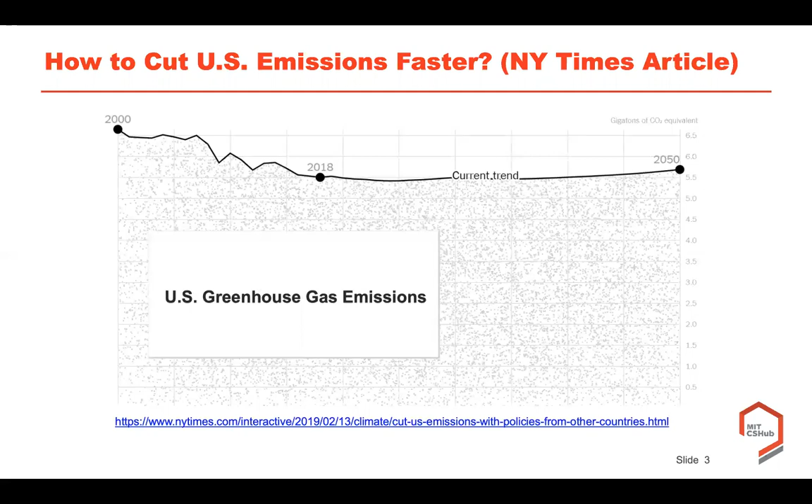In this article, the authors talked about 7 different mitigation solutions around the world, and they evaluated the impact of those mitigation solutions if applied in the US in order to reduce GHG emissions from 2018 to 2050.

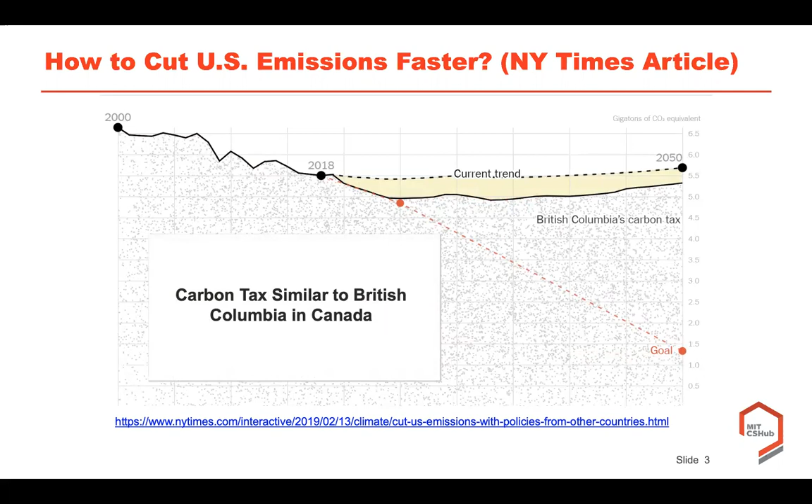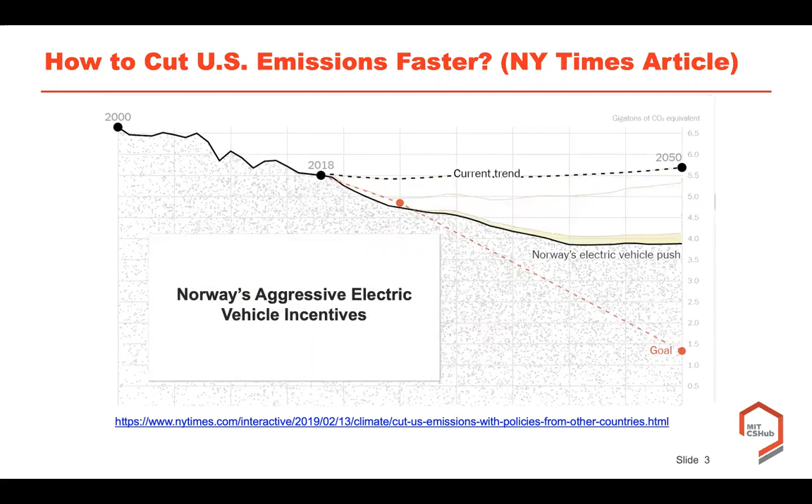The first mitigation solution was a carbon tax similar to British Columbia in Canada. The second was New York's goal for clean electricity generation. Number 3 was Norway's aggressive electric vehicle incentives. Number 4 was China's efficiency target for different industries such as cement, steel, and petrochemical.

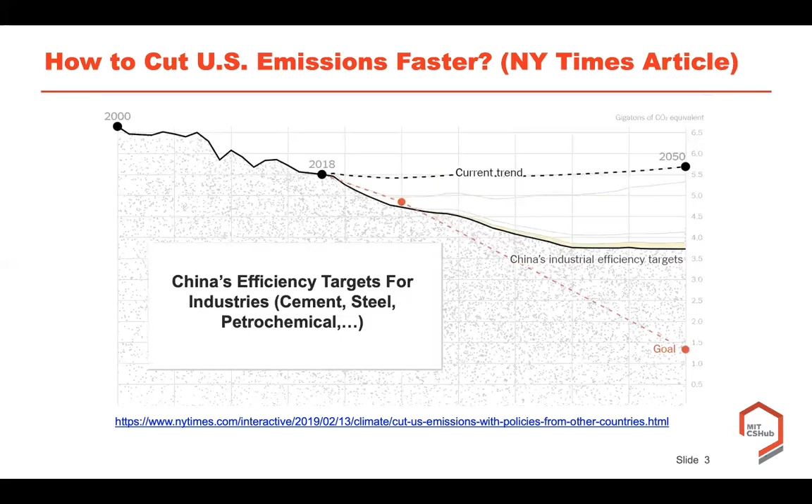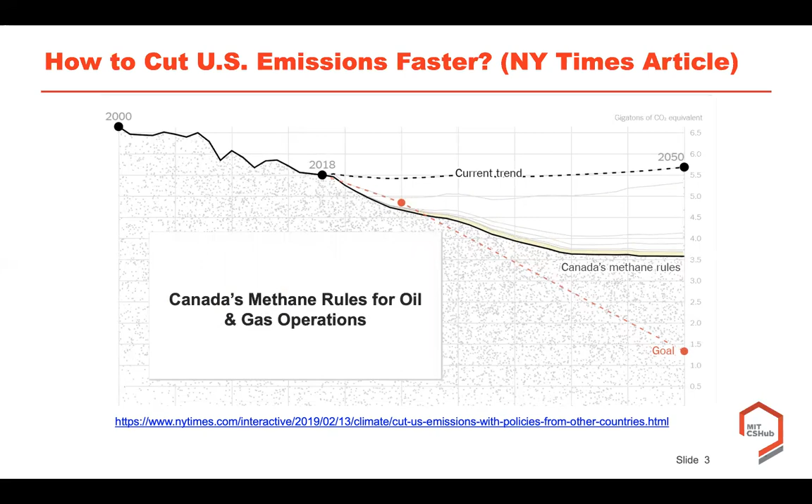Number 5 was California-style energy codes for new buildings. Number 6, Canada's methane rule for oil and gas operations. And number 7, the last one, was Europe's legislation for phase out of HFCs.

You can see that after applying all of those 7 mitigation solutions, by 2050 we still have more than 3 gigatons of GHG emissions. But the goal based on the Paris Agreement is less than 1.5 gigatons of GHG emissions.

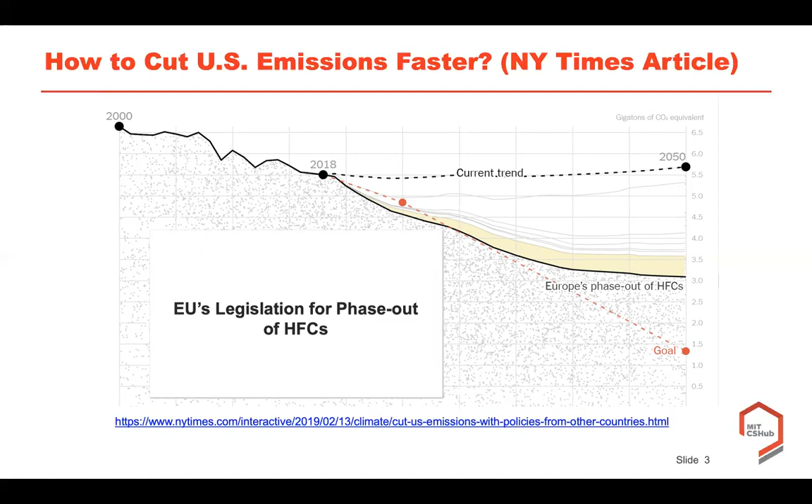So in this study, the main objective was first providing an outlook for the environmental impacts of buildings as well as concrete in buildings in the US. In order to reach this goal, we had several steps.

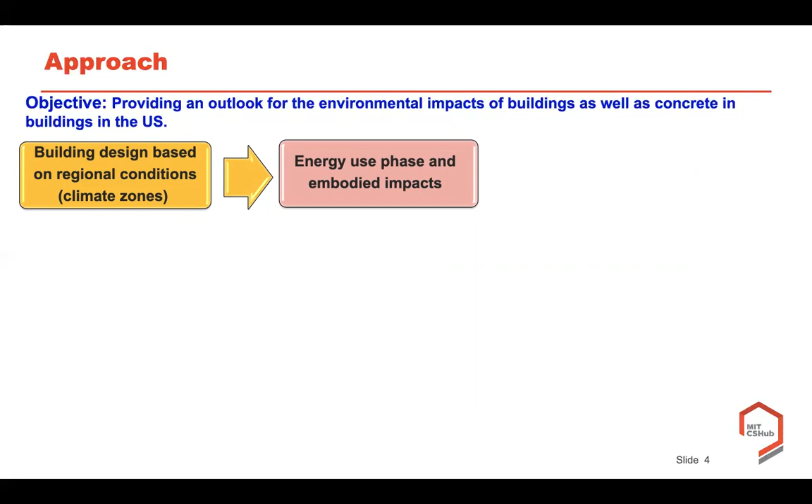The first step was designing reference buildings based on regional conditions or climate zones. Then we evaluated the energy use phase and also the embodied impacts in those reference buildings. After that, we scaled up our analysis from single buildings in different climate zones to the whole US, considering the total area in the US by 2050.

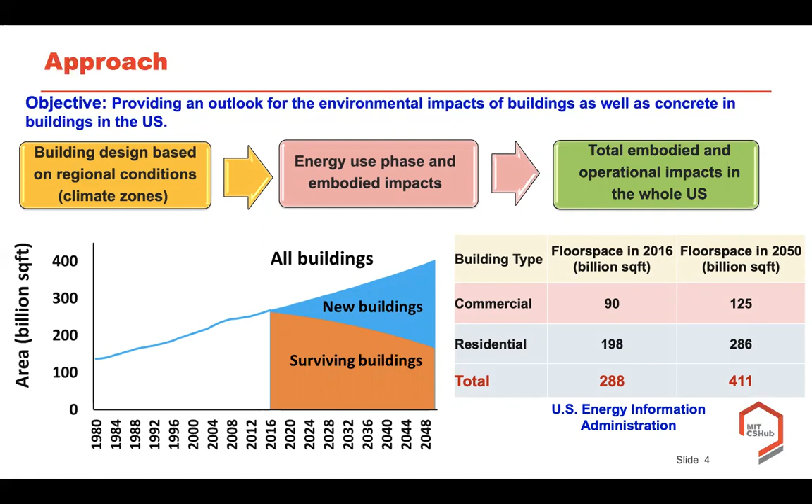We know about the new buildings, we know about the surviving buildings by 2050, so we considered all of this information. The first step was designing the reference building based on regional conditions.

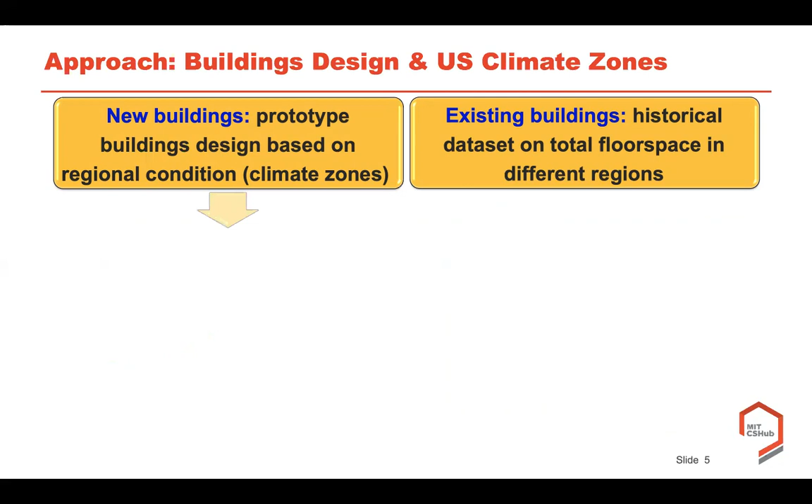As we know, we have 2 different building categories: commercial buildings and residential buildings. In residential buildings, we considered both single-family and multi-family buildings. In commercial buildings, we have more than 10 different categories, so we did a clustering analysis, and based on the results, we considered office buildings and healthcare systems.

Then we evaluated different frames. For example, in residential buildings, we considered wood frame as well as concrete frame and steel frame buildings. So we evaluated all different building frames in the US.

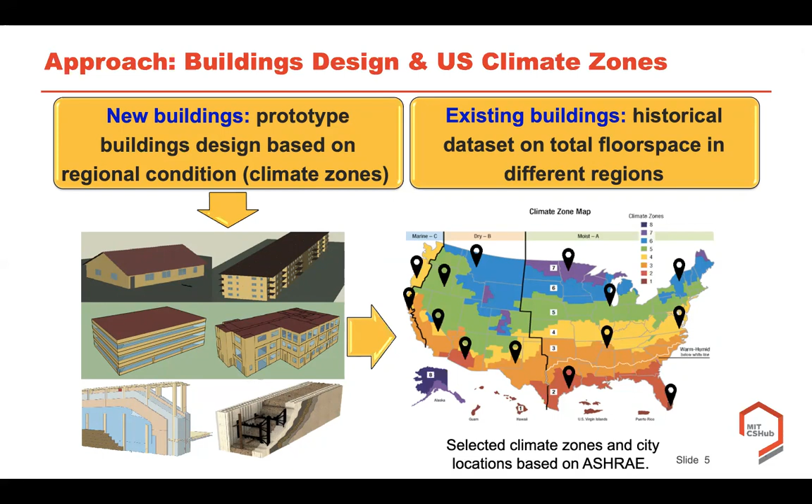We have 14 different subclimate zones in the US, from zone 1A in Miami, Florida, to zone 7 in Duluth, Minnesota. So we designed 14 different reference buildings for the whole US.

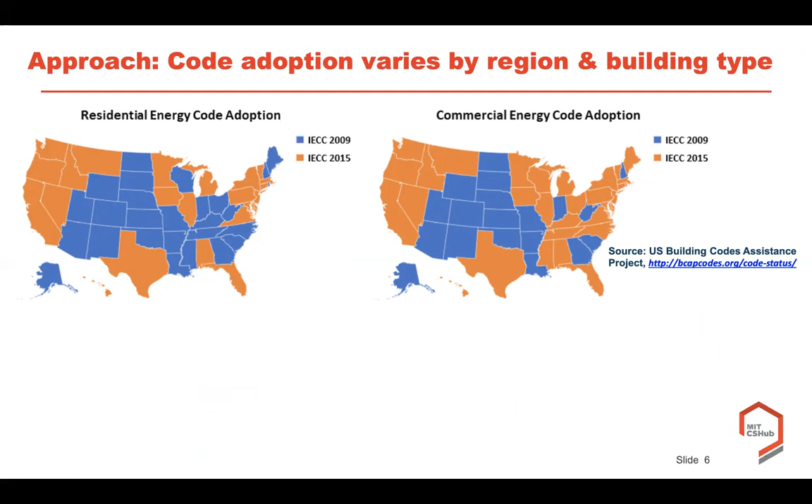For designing reference buildings, we needed to know the code adoptions. We know that code adoptions are different based on regions and also based on building types. There are 2 different code adoptions for residential and commercial buildings.

We all know that building energy codes get more stringent. For example, if we have a 2012 building code, the 2015 code is more stringent compared to 2012. If we consider an energy efficient building code, for example in 2018 or 2021, it will be more stringent compared to 2015.

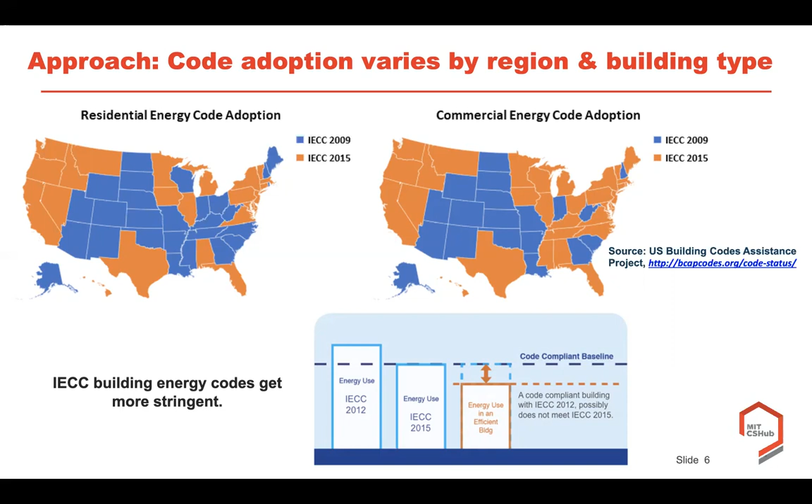In our study, we had three different energy code adoptions. The baseline was IECC 2009, and then we had IECC 2015. We also introduced another energy code adoption, which we called energy efficient, representing the future energy codes for different buildings in the US.

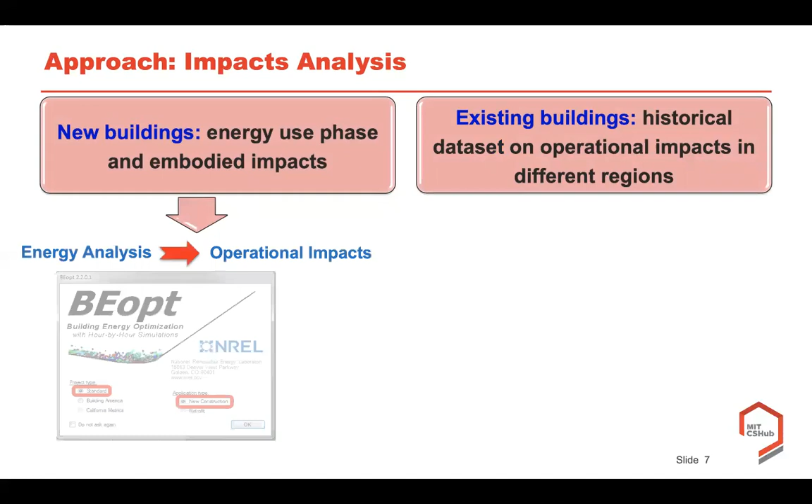Then we evaluated the energy use phase and also embodied impacts of all buildings. For energy use phase, we used the BEopt software tool developed by NREL, then extracted the bill of materials as the output of BEopt, and used that to evaluate the embodied impact using the Athena Impact Estimator for buildings.

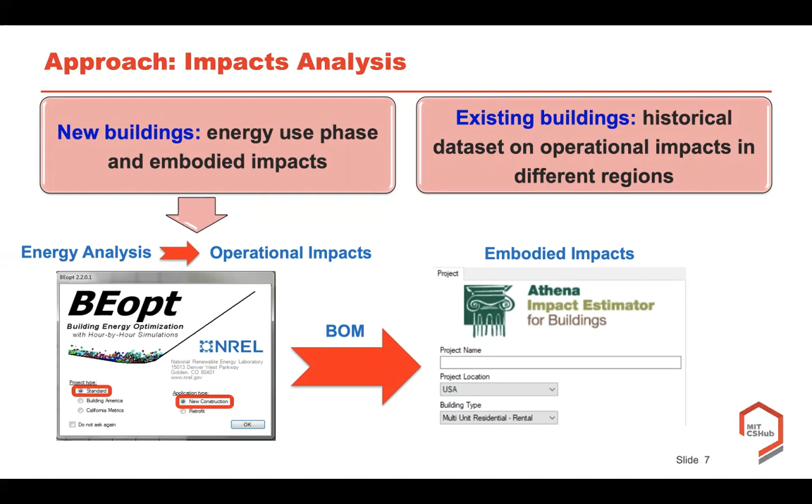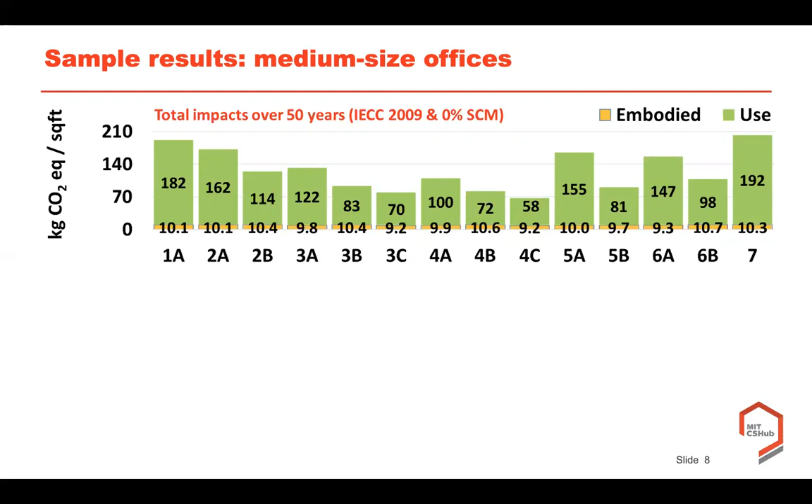This is the sample results for medium-sized offices, with similar results for all different building types. This is the baseline scenario with IECC 2009 and without any improvement in the concrete mixes, 0% supplementary cementitious materials (SCM). As you can see, we have two different bars: yellow bars represent the embodied impacts, and green bars represent the use phase.

You will see that by applying those mitigation solutions, and also by adoption of more stringent code, both embodied and use phase emissions will be reduced in all 14 different subclimate zones, from zone 1A in Florida to zone 7 in Duluth, Minnesota. These are sample results from all different studies across all building types.

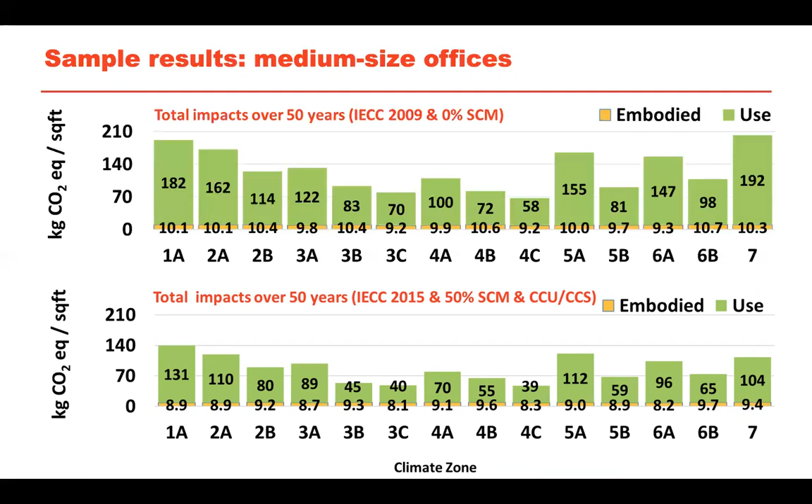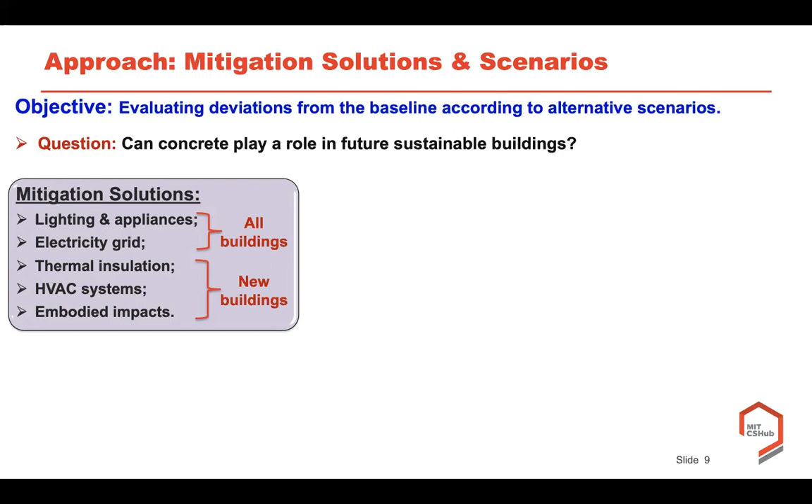The next step was evaluating deviations from the baseline according to alternative scenarios. We had 6 different mitigation solutions: improvement in lighting, improvement in appliance efficiency, and improvement in electricity grid generation, which we called electricity grid evolution. We applied these 3 solutions to all buildings, existing and new. The other 3 - improvement in thermal insulation, improvement in HVAC systems, and improvement in embodied impacts - were applied just to new buildings.

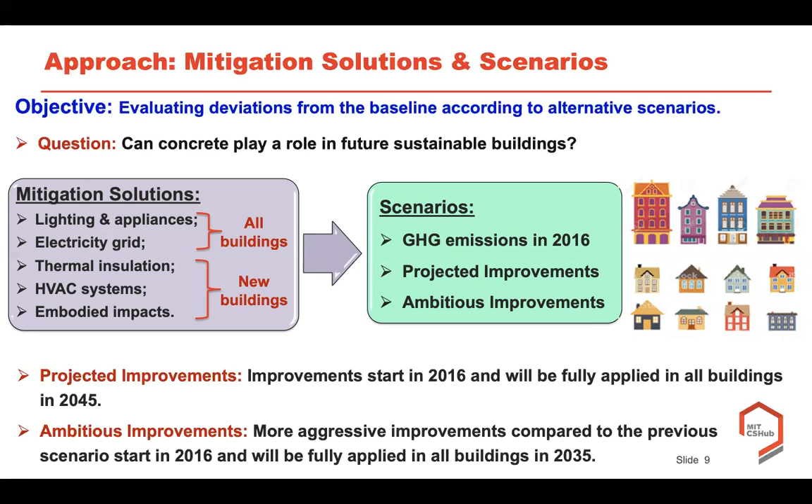We had 3 different scenarios. The first was evaluating GHG emissions based on 2016, which we called the no change scenario. The second was projected improvement, based on projected improvement in different databases. We also had ambitious improvement, which is more aggressive than projected improvement. The main difference is in the timeline: in projected improvement we start in 2016 and finish applying all mitigation solutions by 2045, while in ambitious improvement we start in 2016 but finish 100% application by 2035.

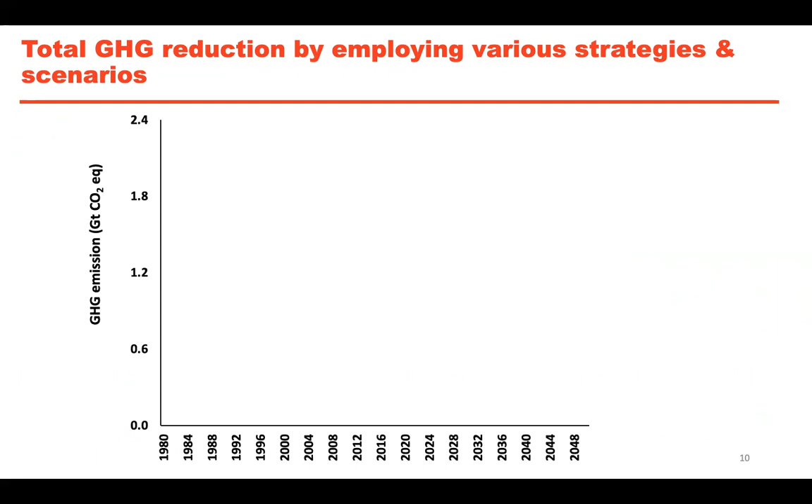This is our main graph, similar to the New York Times graph I showed at the beginning of my presentation - the historical database for GHG emissions from the building sector in the US. In 2016 we had 1.75 gigatons of CO2 emissions, equal to 27% of total US GHG emissions, considering emissions from industry, transportation, and buildings.

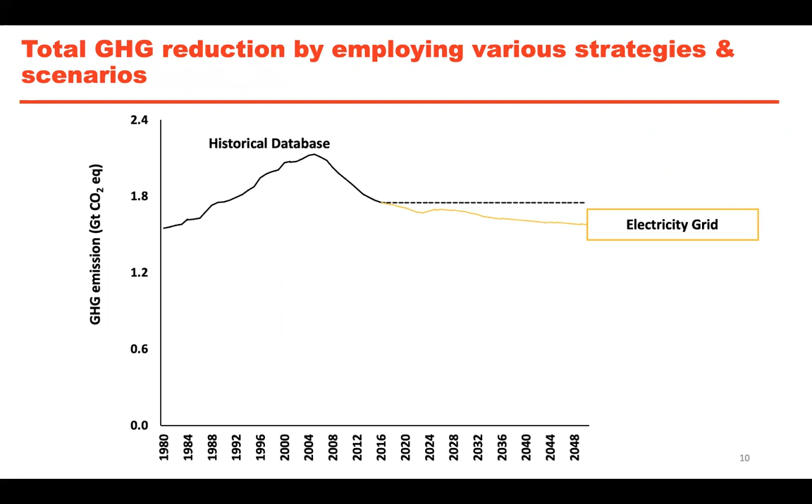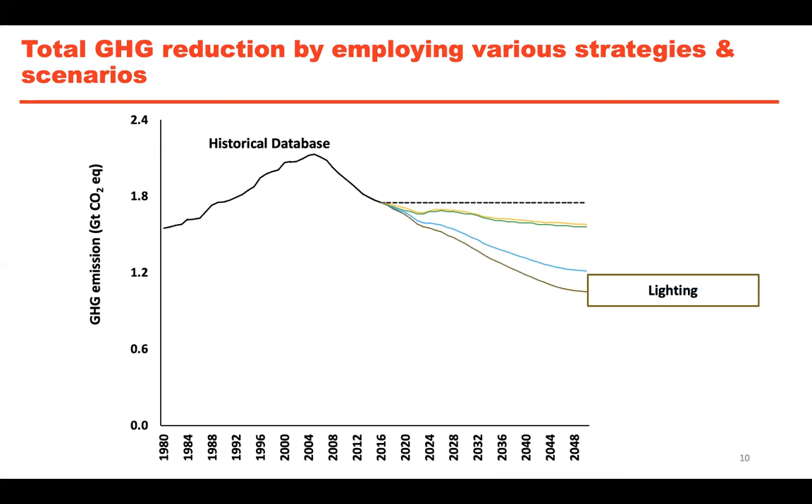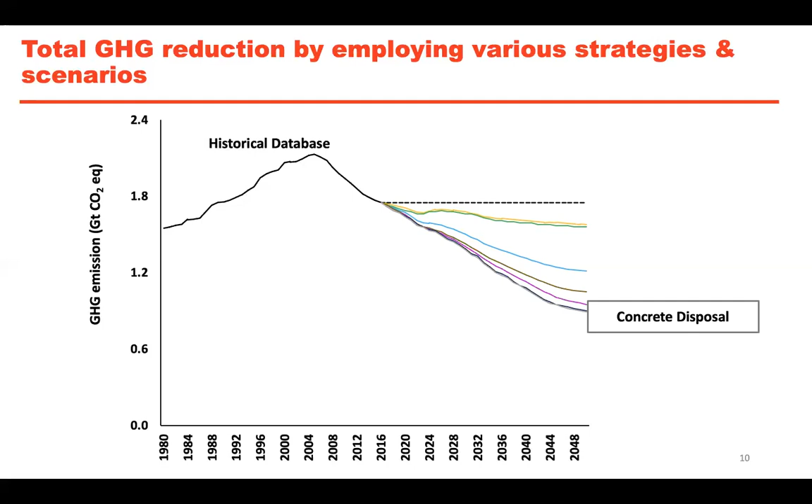The first mitigation solution was electricity grid evolution, then the second was concrete production, where we consider different mitigation solutions to reduce the impact of concrete in buildings. The third covers improvement in appliances, lighting efficiency, HVAC efficiency, thermal insulation efficiency, and improvement in carbon uptake after concrete disposal - we consider both concrete disposal and carbon uptake afterward.

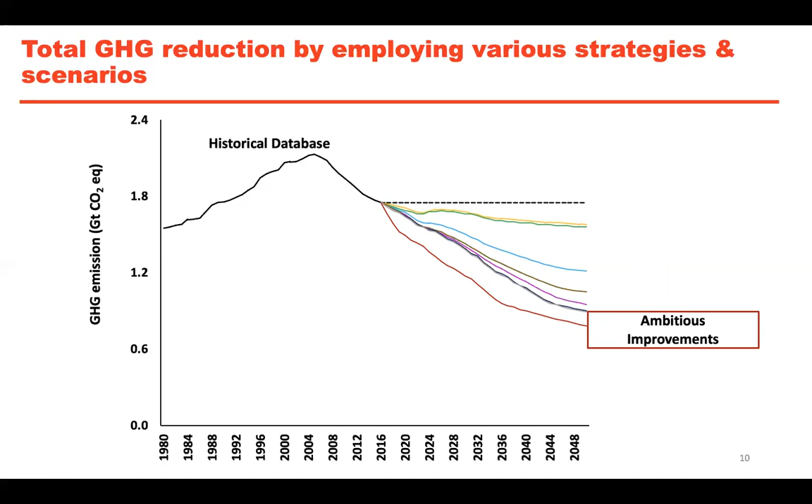If we consider the projected improvement, we can have 47% GHG reduction in 2050 compared to 2016 levels. If we consider ambitious improvements, which are more aggressive, this reduction will be 56% compared to 2016 levels - around 1 gigaton of GHG. It's interesting that this amount equals almost 30% of the total reduction expected under the Paris Agreement.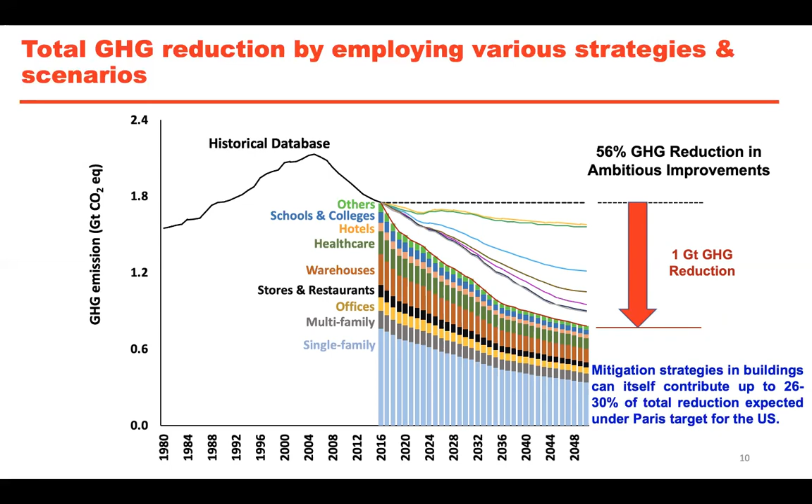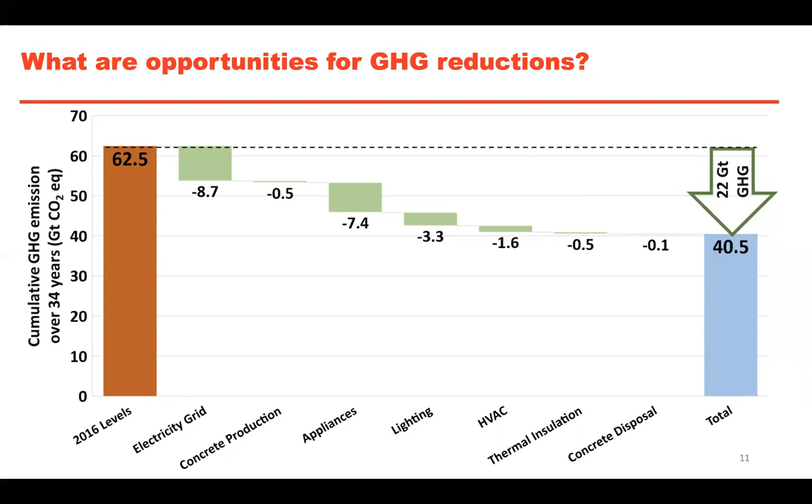I talked about annual GHG emissions in the US. Now this is about cumulative GHG emissions over 34 years, from 2016 to 2050. If we continue to build and operate buildings similar to 2016 levels, after 34 years total GHG emissions will be around 62 gigatons. But if we apply the different mitigation solutions I introduced, after 34 years, in 2050, total GHG emissions will be around 40 gigatons - a reduction of 22 gigatons, which is significant.

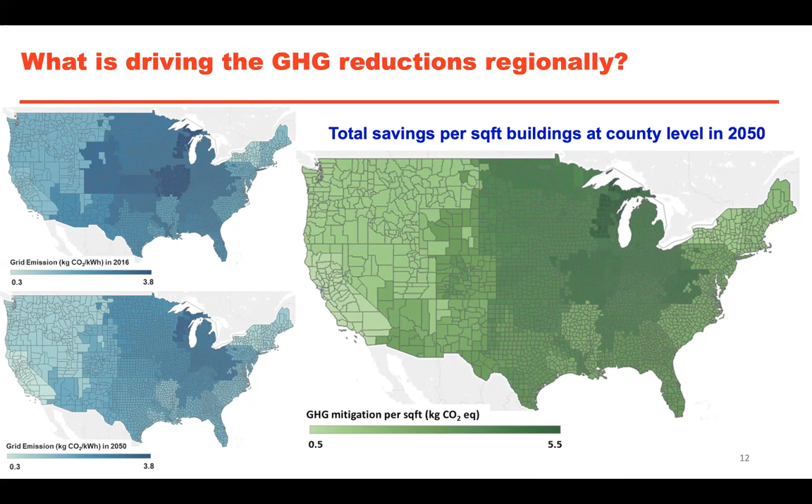You will see that the Midwest areas still have the highest savings after applying those mitigation solutions, meaning there's a strong correlation between the electricity grid evolution map and total savings in the US. This means electricity grid evolution is the driving factor behind GHG reduction in the US. I talked about the amount of GHG reduction, and this graph shows the cost of GHG reduction.

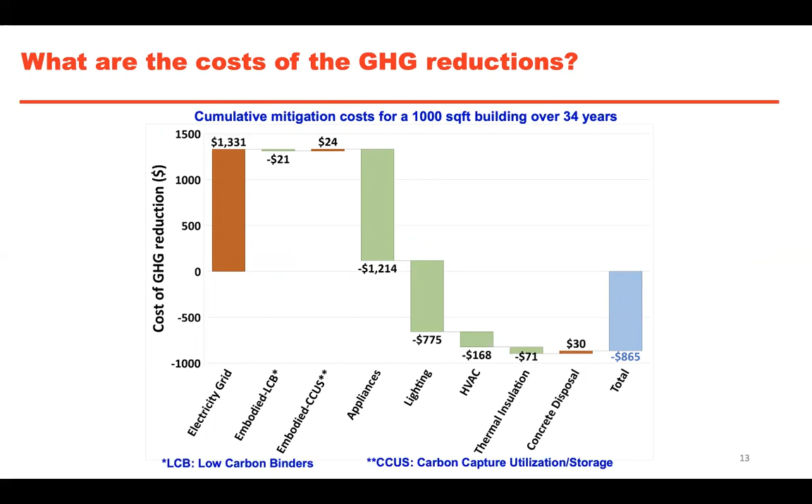This graph shows the cumulative mitigation costs for one building, a 1,000 square foot building, over 34 years. It shows that not only will you get savings in GHG reduction, but also savings in the dollar amount spent on that building over 34 years. Actually, we can save almost $865 over 34 years by applying those mitigation solutions, meaning we get benefit from applying them.

This graph is the abatement cost graph, in dollars per ton of CO2. You will see that after applying mitigation solutions for lighting and appliances, we get benefit. But for electricity grid evolution, carbon capture utilization and storage, and carbon uptake, we need to spend money in order to reduce GHG. So we see different costs regarding different mitigation solutions in the US building sector.

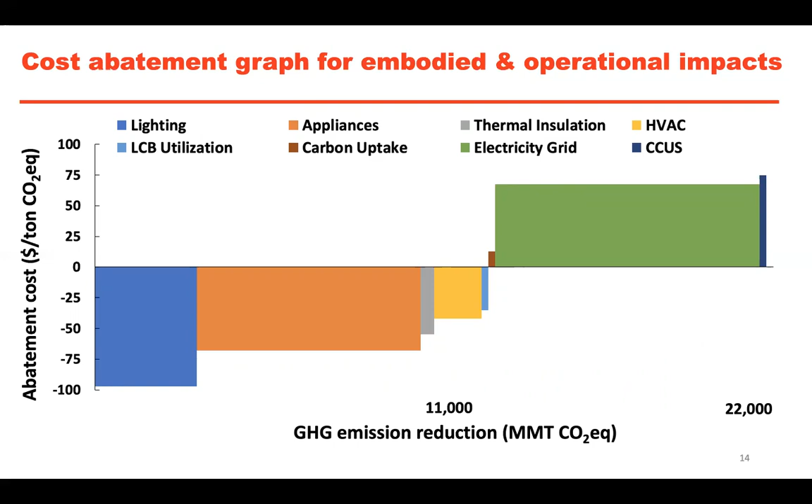Here we wanted to focus more on the embodied emissions in the US. We had 4 different scenarios regarding the embodied impacts of concrete, focusing just on concrete in the buildings. The first scenario was applying low carbon binders, just applying supplementary cementitious materials.

The second scenario was applying low carbon binders plus carbon capture storage in cement plants. The third scenario is applying low carbon binders and carbon capture utilization in synthetic aggregates in different cement plants in the US. In the last scenario, we assume that if we apply low carbon binders, CCU, and CCS together, we will finally have a concrete without any emission, with 0 kilogram emission. That's the goal of the different mitigation solutions for embodied impact.

Regarding synthetic aggregates, which have a huge impact on the embodied impact, we found a couple of companies in Europe and the US currently working on carbon capture utilization in synthetic aggregates. We based our assumptions on those plants and processes for CCU in cement and concrete systems.

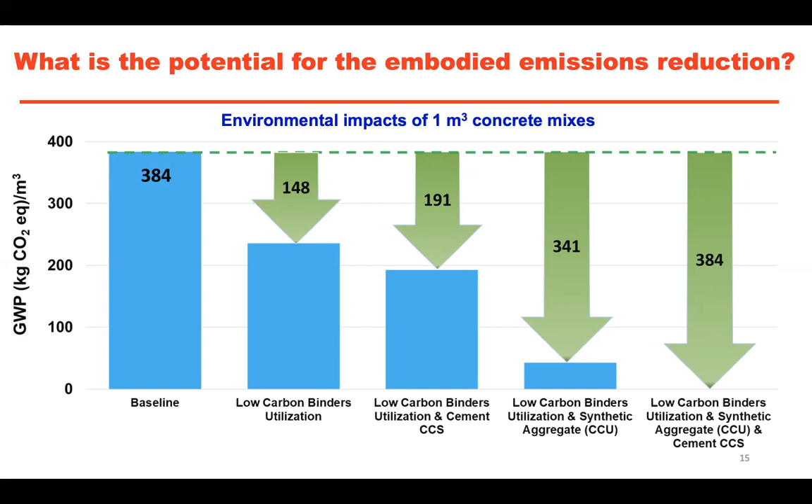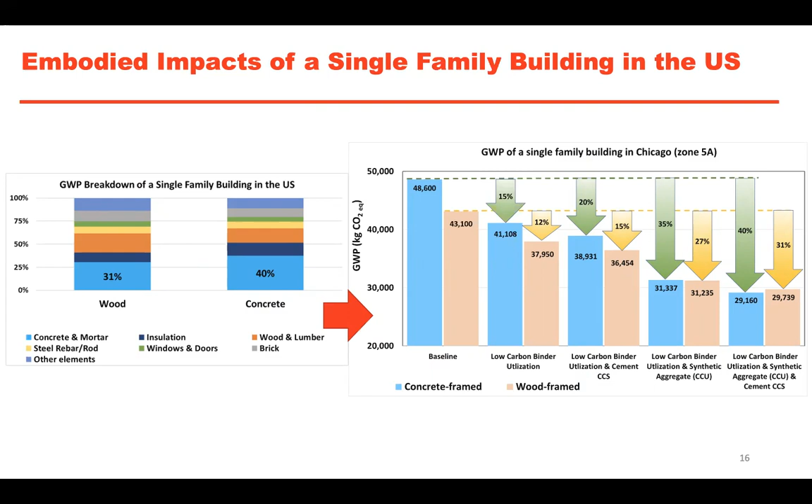Based on these mitigation solutions, if we apply those scenarios in single family buildings, for example in Chicago, we see the impact. In the left-hand graph, a wood frame building still has 31% of GHG emissions coming from concrete and mortar, mostly from the foundation. A concrete frame building has 40% of GHG emissions coming from concrete and mortar. If we apply those mitigation solutions, at the end of the process we'll have concrete frame buildings with lower impact compared to wood frame buildings.

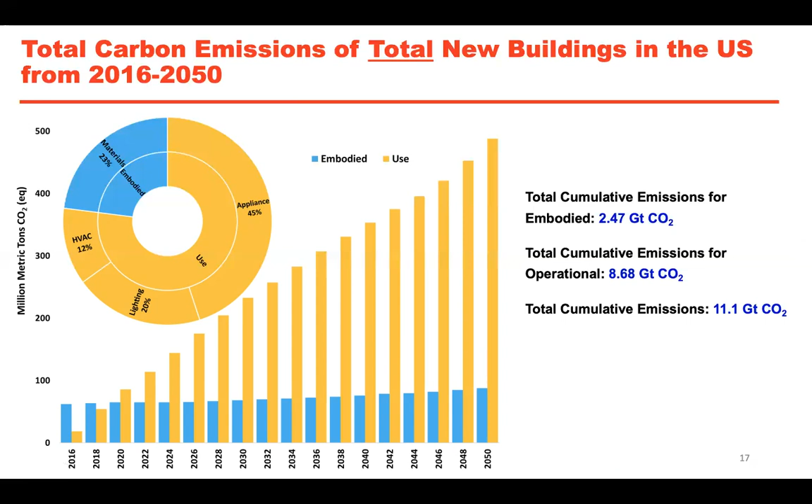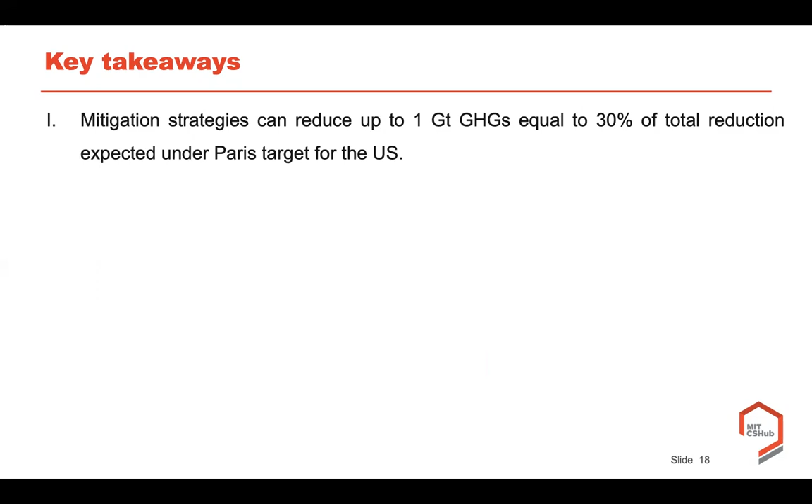Key takeaways: first, mitigation strategies can reduce up to 1 gigaton of GHGs, equal to 30% of the total reduction expected under the Paris Agreement. Second, electricity grid evolution from 2016 to 2050 leads to the highest GHG reduction, and is driving GHG reduction across the whole US building sector.

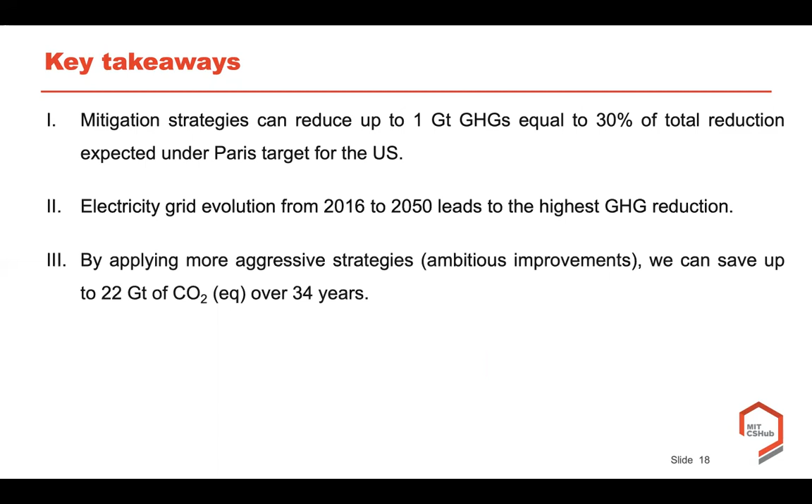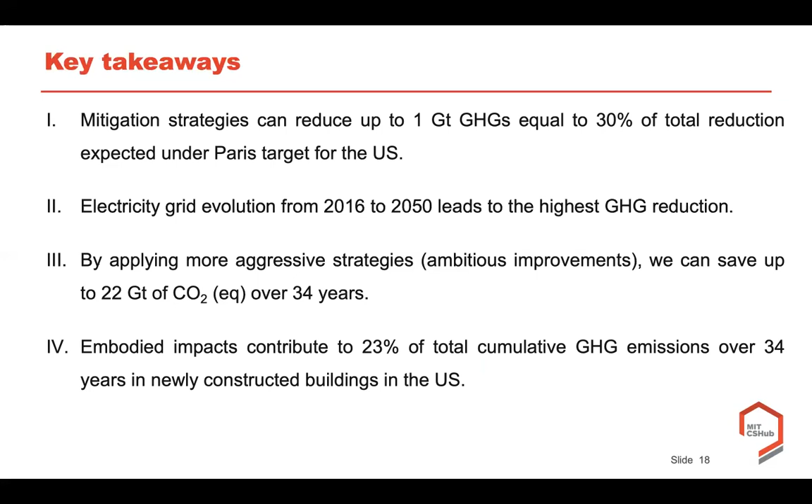The third takeaway is that by applying more aggressive strategies, which we call ambitious improvements, we can save up to 22 gigatons of CO2 over 34 years. And the last one is that embodied impacts contribute to 23% of the total cumulative GHG emissions over 34 years in just new buildings in the US.